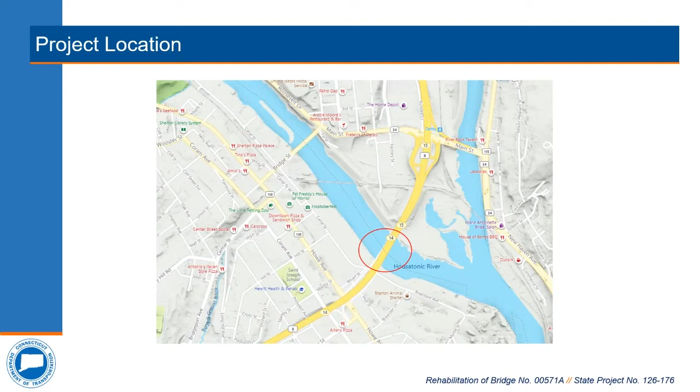Before we jump in, I'd like to define some key components of a bridge. A bridge is made up of two main components, the superstructure and the substructure. The superstructure consists of parapets, deck, and load-carrying members such as steel girders or steel trusses. The substructure acts as the foundation, supporting the loads from the superstructure and transmitting those loads into the ground. Only the bridge's substructure piers will be addressed in this project. The parapets, deck, superstructure, and substructure abutments will not be impacted.

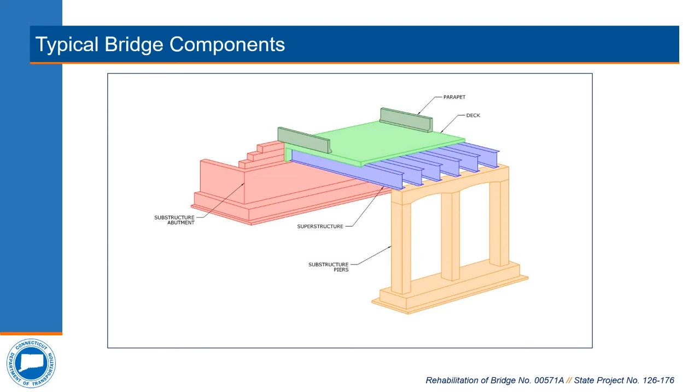I'd also like to define a key term, scour. Scour is the erosion of streambed or bank material due to flowing water. When scour occurs around a bridge pier, it can result in instability, so oftentimes countermeasures are installed around the pier for protection against this.

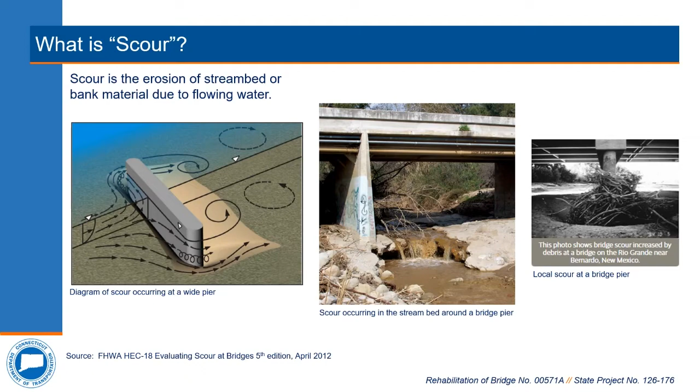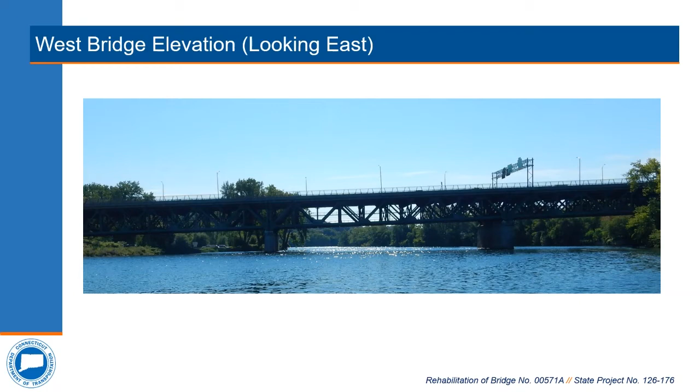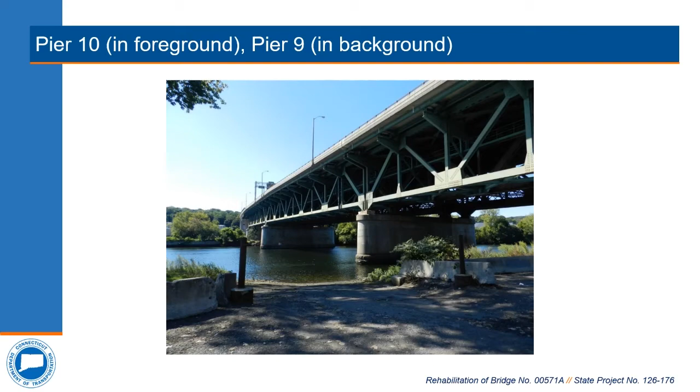Now I'll discuss the existing bridge and the purpose and need for the project. The bridge was originally constructed in 1951 and widened in 1990. There are three main truss spans over the river. Piers 9 and 10 are within the river, and the substructure piers are reinforced concrete on steel piles into bedrock. Construction of Project 126-170 was completed in 2019, which involved steel repairs and painting of the steel truss superstructure and installation of a scour monitoring system. This project extended the design life of the superstructure an additional 25 plus years.

Now this project, Project 126-176, is addressing the substructures. Routine underwater inspections are performed every 2 to 4 years. The results show history of scour at Piers 9 and 10. The 2020 underwater inspection report indicated a scour rating of 5, which corresponds to fair. However, the upstream face of Pier 9 has a scour hole with exposed steel piles. A recent scour prediction evaluation found that scour countermeasures are warranted for the protection of the foundations of Piers 9 and 10.

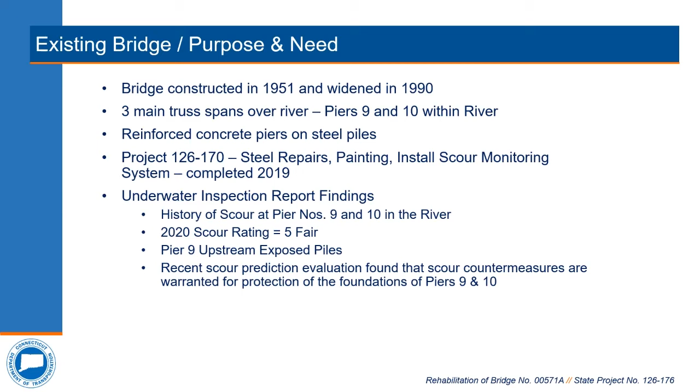We investigated several different alternatives for the scour countermeasures. The preferred alternative is precast concrete armor units, otherwise known as precast concrete jacks. These are six-legged precast units typically installed as bundles, which interlock together, and it's this interlocking pattern that prevents movement and protects the riverbed. This alternative has a lower construction cost than other alternatives studied. They're quick to install, require only minimal excavation of the existing riverbed, perform well, and require minimal maintenance.

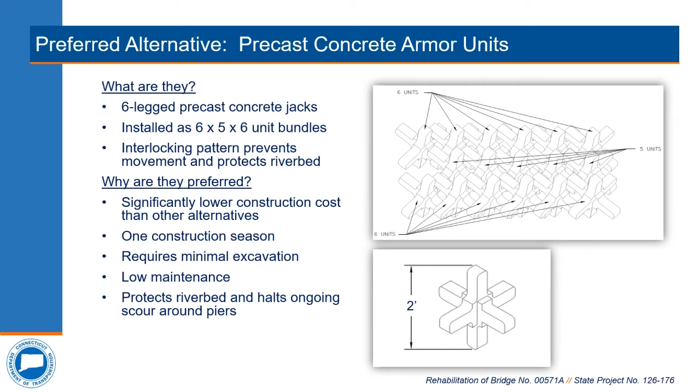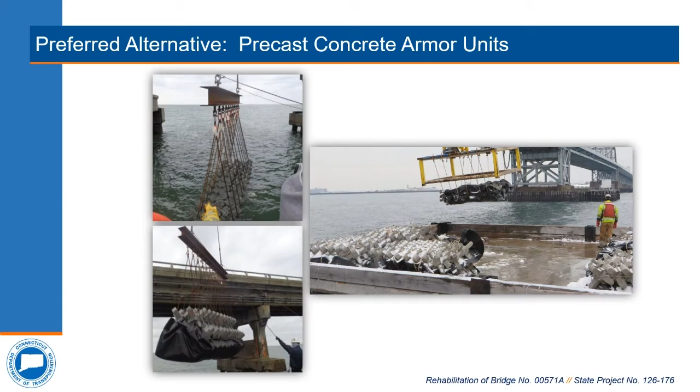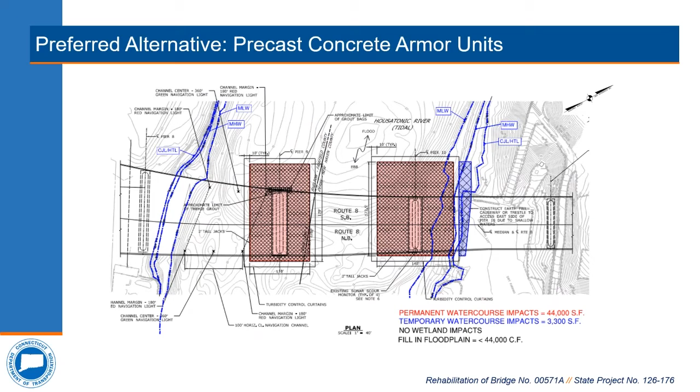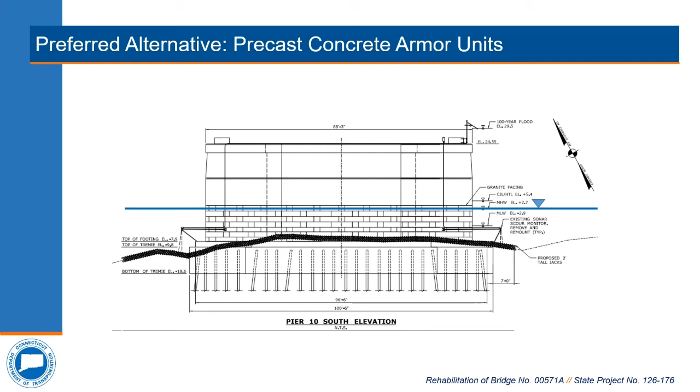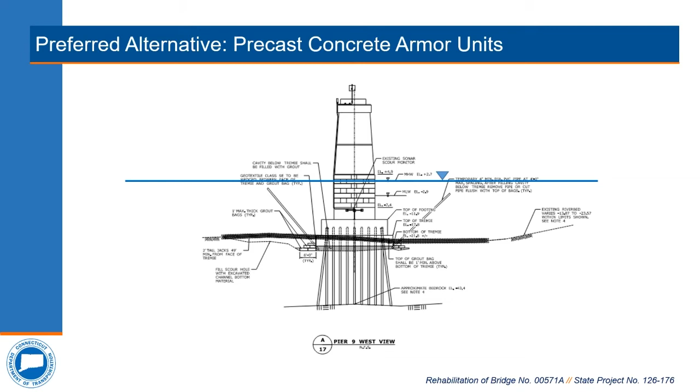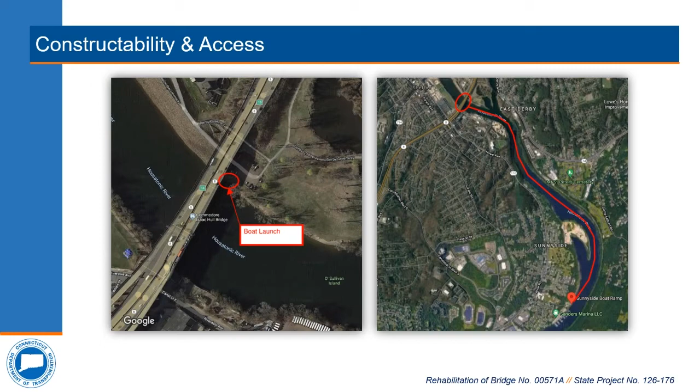So in this area to the north of Pier 10, near the Derby shoreline, a temporary trestle or platform will be used instead of barges.

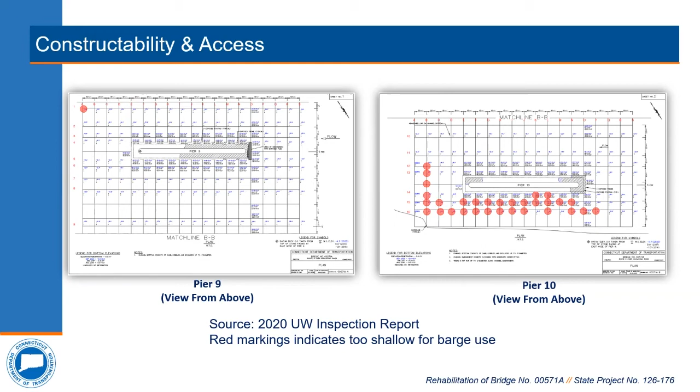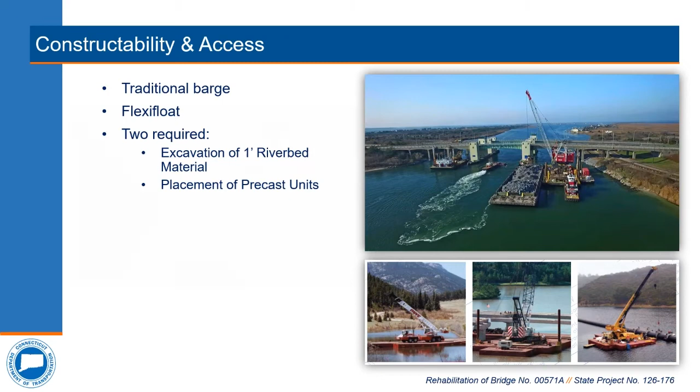We've also investigated possible staging and stockpile locations for equipment and materials. One potential location is the parking lot below the bridge on the Derby side. This parking lot was used as a staging area for the previous project, 126-170. Access and parking to the Derby Greenway would be maintained at all times.

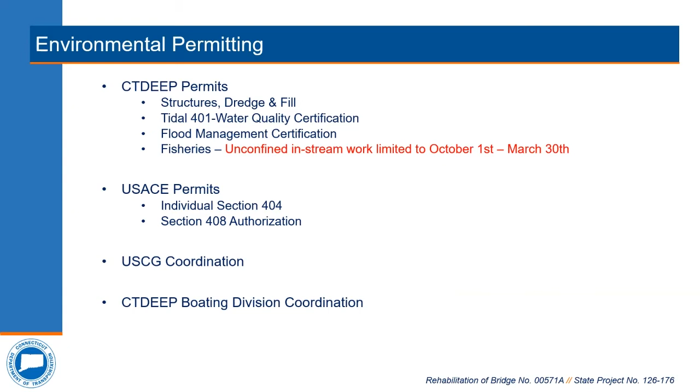Currently, we're at the tail end of the preliminary design phase. After this, we'll move into final design, expected to take a little over a year. The project is expected to be advertised to contractors in May of 2023. A contractor will then be selected and construction will begin October 1st, 2023. It's estimated that it'll take 3 months to complete each pier, for a total of 6 months, putting us right at March 30th, 2024 as a completion date.

The estimated construction cost is right around $8 million for this project, made up of 80% federal funds and 20% state funds. There is no municipal funding for this project.

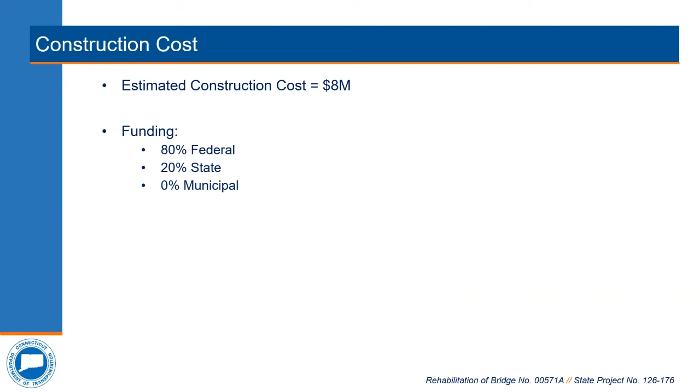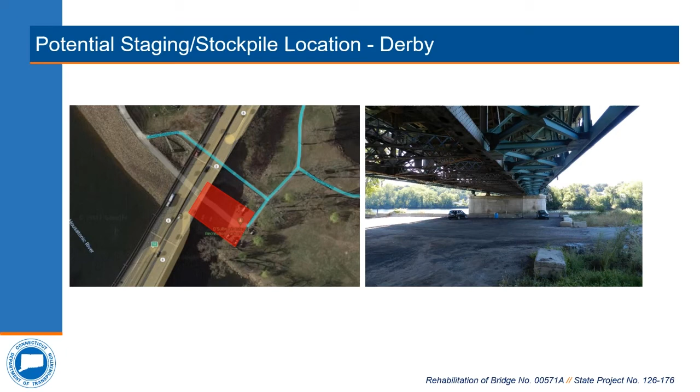Another question: how is the project funded? The estimated cost for the project is $8 million, and it is funded 80% federal and 20% state. There's no municipal contribution to that. And as mentioned earlier, construction should begin in October of 2023 and be completed by March of 2024.

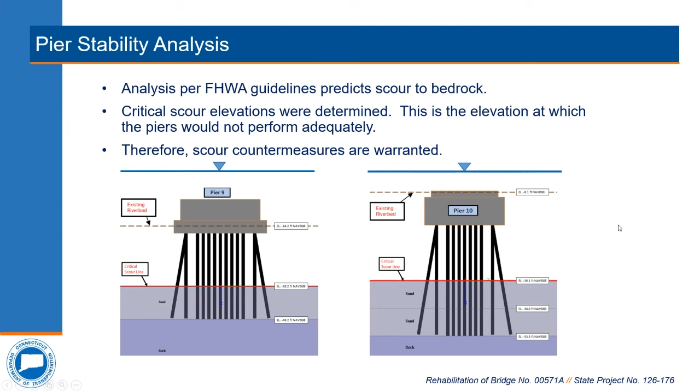Another question: what happens if the river floods during construction? The Connecticut standard specs require the contractor to develop a flood contingency plan. That would be reviewed and approved by both the state and AECOM. It will include protocols for the protection of the construction site, and also for the tie-offs and relocation of equipment before and during any floods.